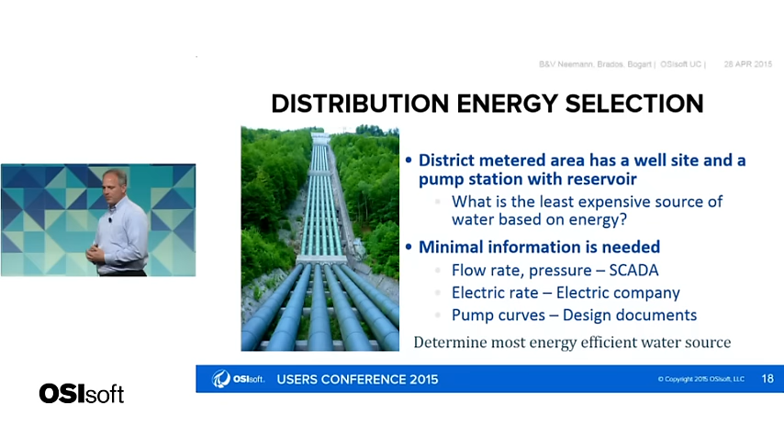Some of the stuff that we've done at Black & Veatch, energy focused, again, on the water side, distribution energy selection, what's the best water source. A district metered area has a well site and a pumping station with a reservoir. For those of you not in water, the district metered area is just basically a big area. The particular one we're talking about has about 6,000 houses and industrial areas. They're drinking about 60 million gallons of water a day in that area. With these two different water sources, what is the most electrically energy efficient to provide water to that?

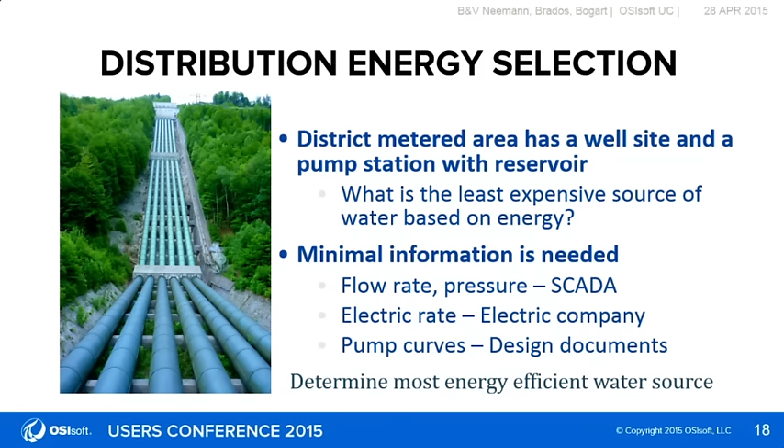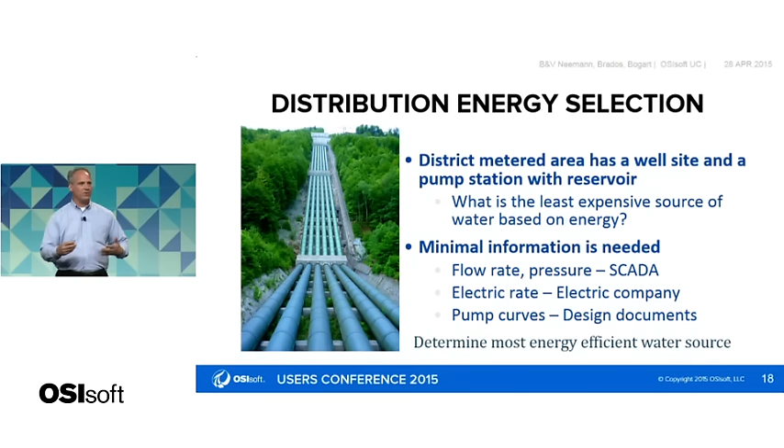To answer that question, we need flow rate and pressure out of our SCADA system. We need some system design curves, pump curves. We also need that electric company information about what is our billing rate, how much are we charging for all the energy that we're using. I also did want to point out here that I didn't have electric energy from the pump sources. I've only got the mechanical energy. And we were able to get them some pretty good answers with just that little bit of information.

We are obviously bringing this stuff into PI. AF is a wonderful thing. Templates are wonderful things. And the ability to stack templates on top of templates is a wonderful thing. So we obviously want to calculate what is our electrical cost per million gallons. I have to take my gallons divided by a million, obviously, and then my electrical power cost.

Already you're seeing two things factored there, but electrical power cost is interesting because I'm getting my data about every 15 minutes. I have to, in that 15 minutes, figure out which rate structure am I in. Not only that, what time am I inside of that rate structure? So each one of those calculations are inside of each other, and PI does it beautifully and quickly, and we're very happy with that.

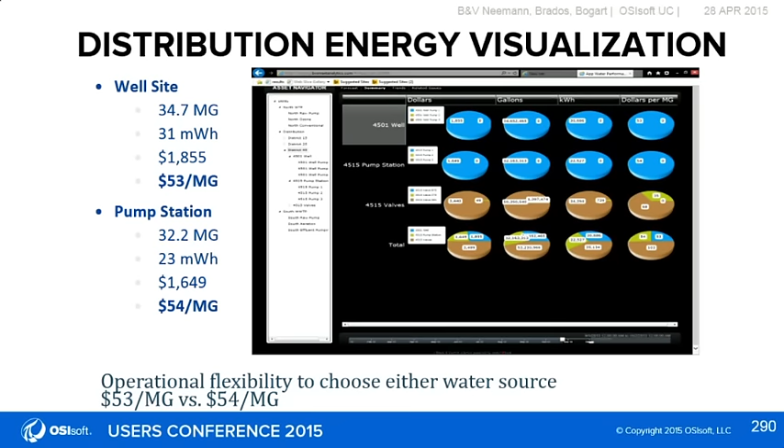At first blush, it looks like we've got the operational flexibility to choose either one of our water sources, right? But let's dig a little bit deeper because we like analytics. What we see is when we do our millions of gallons per 1,000 kilowatts or megawatt hours of energy, the pump station was more electrically efficient, about 1.4 million gallons per megawatt hour versus 1.1 million gallons per megawatt hour. So why does the cost look the same?

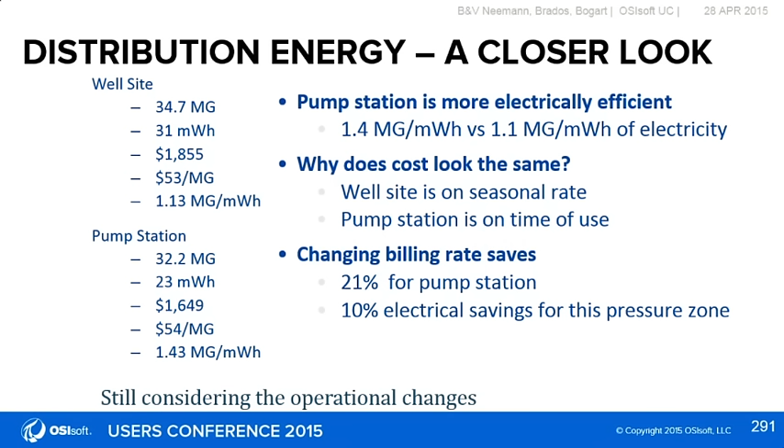And as we dug a little deeper, sure enough, one of them is in time of use, and one of them is in a constant throughout the system. So just changing the billing rate is going to save us 20% from this one water source. That's going to be about 10% across this one area. So it's an electrical savings. We didn't change the way we operated. We didn't change anything we do. We just make a phone call.

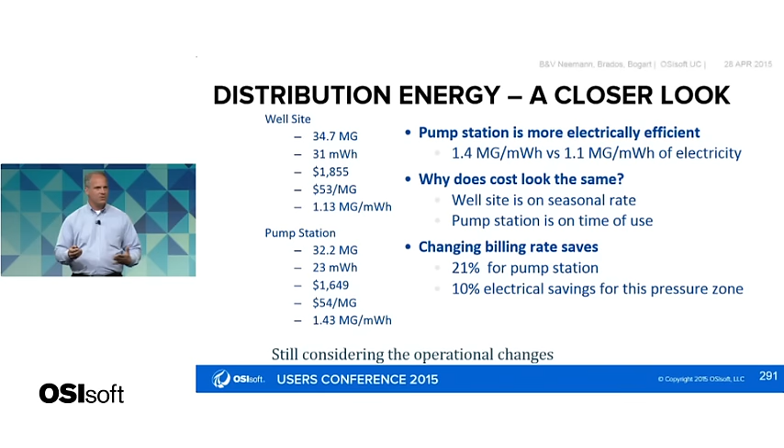Okay, great. That's yesterday. What are you going to do for us tomorrow? Well, what we're seeing is that we have different efficiencies at different flow rates. And why is the pump station more energy efficient than the well site? The answer already is that the well site is a single 300 horsepower pump that has to change its speed to match the demands for all the water that's flowing. The pump station is a combination of 5 pumps. So there's different combinations, and 2 smaller pumps at the pump station are more electrically efficient at lower flow rates.

So let's look at the efficiency at different flow rates. We'll also need to consider electrical demand charges. I may not want to start that 300 horsepower pump even though it's more efficient at the higher flow rates. Let's work into our demand predictions. Let's look into the water production costs. The cost of water in the reservoir is coming out of a treatment plant that's got chlorine and all other kinds of great treatment chemicals. Let's take those costs into effect as opposed to what's coming out of the ground that's relatively inexpensive to treat.

However, it does have an environmental impact. We want to be good stewards of our water and not pump everything out of the ground. Oh, by the way, there's actually 6 water sources to balance across in this equation. So doing this analysis, we're going to actually come up with different operational things. Haven't solved that yet. We're going to submit our paper, and hopefully we'll get selected, and you're going to hear that next year.

The next example that we did out in the real world is a drinking water station. Different customers, got 3 250 horsepower pumps. Again, these kind of start in a lead lag to be able to provide water to this area. The operator reports that 3 pumps are needed more often to meet flow requirements, which seems unusual for those guys, right? Great, we're happy to come in and look at that. Again, we need pump speed, flow rate that's coming out of the SCADA system, pump design curves.

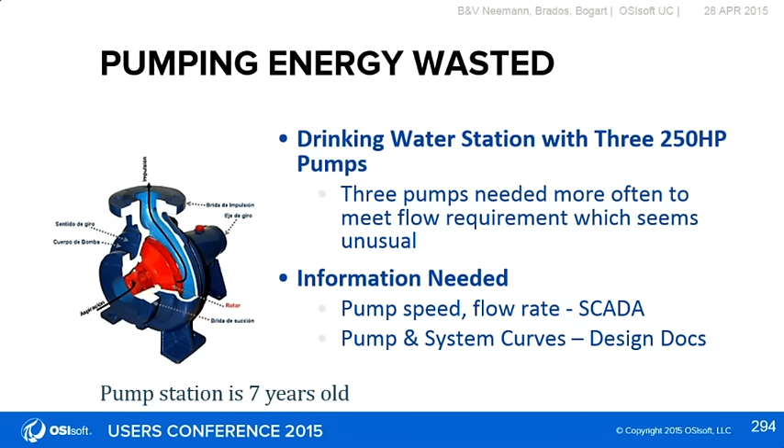Notice again, not on this list, electrical is not there. So you guys that are designing power systems and PI systems and water systems, it's great you're bringing in the suction pressure and the discharge pressure and the speed. Please bring in the volts and the amps and the kilowatts coming out of the VFDs. It's going to make our lives so much easier. It's worthwhile saying that the pump is 7 years old.

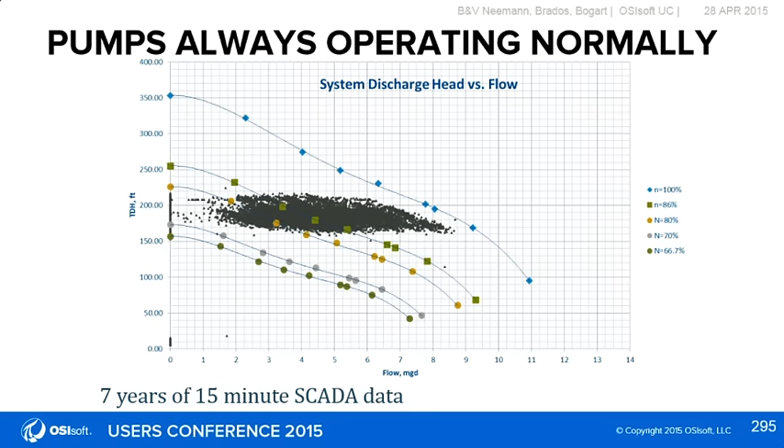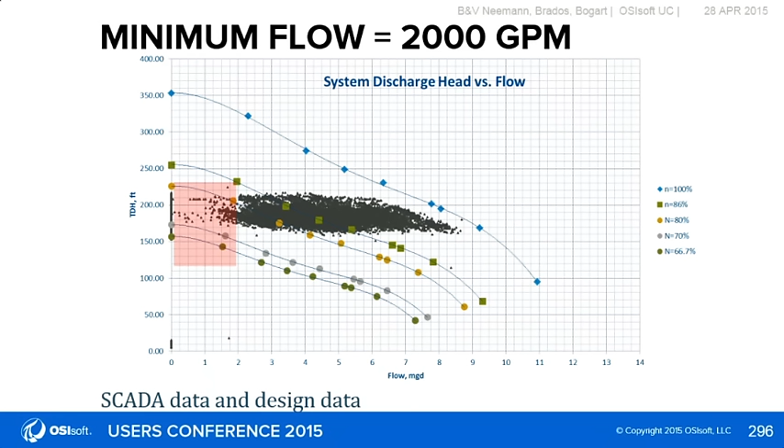It looks normal. However, just looking at the SCADA data, when you throw on the pump curves, it turns out that there is a minimum flow requirement of 2,000 gallons per minute. And sure enough, you can see a pretty significant piece of data that they're spending time down there. In a smaller room, I would ask what happens when you run a pump at high speed with low flow rates. The answer is you get recirculation cavitation.

These are both pumps, pumps 1 and 3 that came out of that station. Pump 1 that's on the right has completely eroded away. Those are supposed to look identical. The one on the left has got significantly less wear. So what happens, for the water people, is you've got a pump that's basically churning water. So you're turning a blender basically inside of a pump cavity, and that water is literally eroding away that impeller. The one on the left, not nearly as eroded.

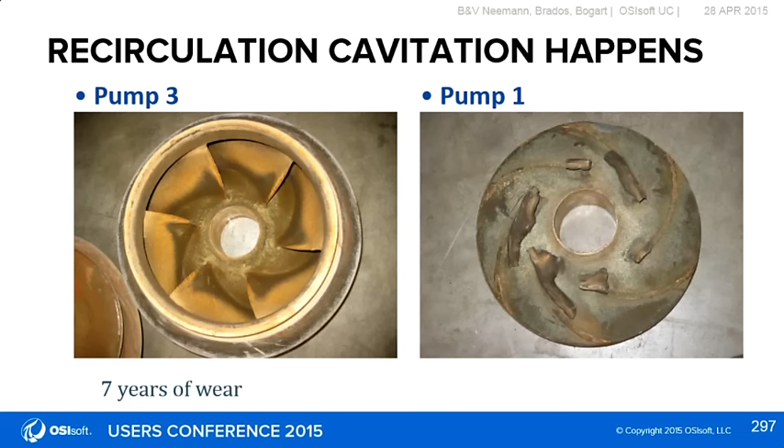The reason for that is there's lead, lag and off, so you can tell it which pump I want to run at which time. In 7 years, they never really changed it. So at those low flow rates, pump 1 runs all the time; at the higher rates, 2 and then 3, so pump 1 got the most amount of wear anyway.

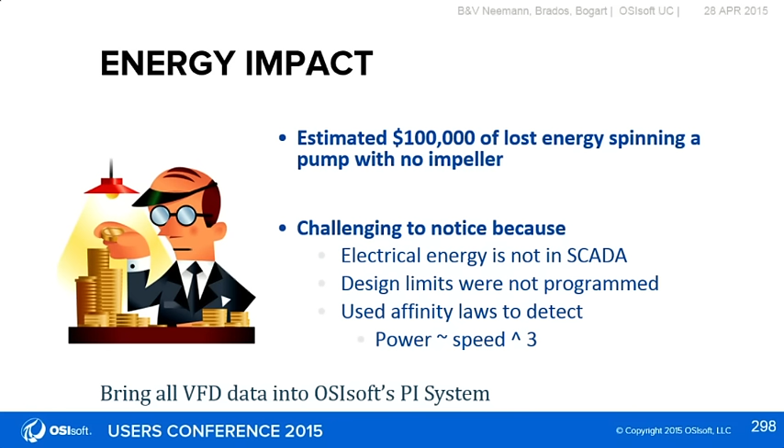What's the energy impact along with that? We estimated there's about $100,000 worth of lost energy savings spinning a pump that has no impeller for about the last year and a half. Again, this was extremely challenging to notice because electrical energy is not in SCADA. And of course, the design limits were not designed into the SCADA system.

For us to solve this, we ended up using the affinity laws so that power is proportional to the cube of speed. So again, please bring that VFD data into your PI system. It's going to help us with a lot. So those are 2 examples that we've solved. Looking forward to sharing many, many more.

I want to talk a little bit about connected services. Jeff had mentioned it before that we've got lots of PI customers that are out there. We've got a large server sitting in Kansas City, which is Black & Veatch headquarters. We are bringing all of that data. Connected services, we've been talking with PI and OSIsoft about that, and we're actually pretty excited about it. So how are we going to end up doing that?

The customer on-site database can obviously publish information into the cloud. It is a publish and subscribe, so they get to decide what it is that they're going to publish up to the cloud. The Black & Veatch PI server then subscribes to that customer data so that we can bring it in. Our PI server is going to do that analytics on it. That's very important for us. And then once we've done that analytics, be able to publish that analytical result back out there.

The benefits for that, of course, is the customer data is secure. Black & Veatch has got great security, and we've been keeping the power companies happy for 20 plus years with our security. It is challenging to do that. There's lots of stuff to be NERC CIP compliant, which is on the electrical power side, for the water side. So their data is secure, our data is secure, and our intellectual property is secure.